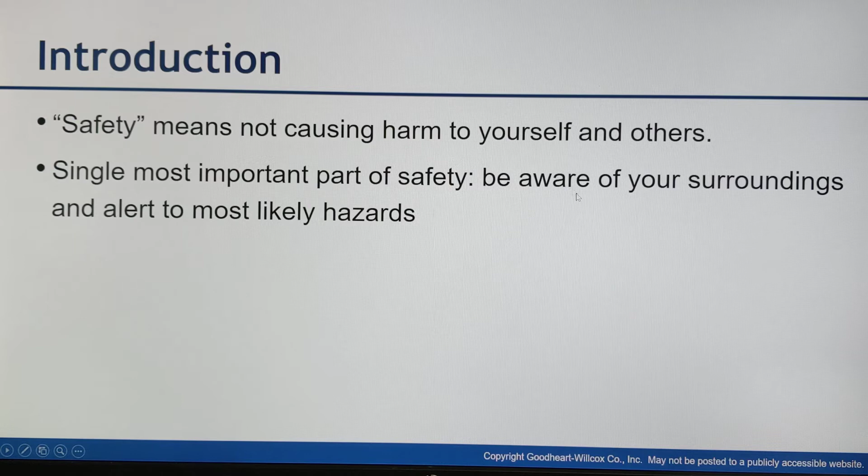The single most important safety practice is to be aware of your surroundings and alert to the most likely hazards. In the welding shop, if you see water on the floor, you don't weld on top of it. If you're going to use a grinder, have your face shield, safety glasses, and earplugs in. If you're around somebody using a torch, don't stand right next to them while they're using the flame. It all goes back to every field you're going to be in: know your surroundings and keep an ear and an eye out for what happens.

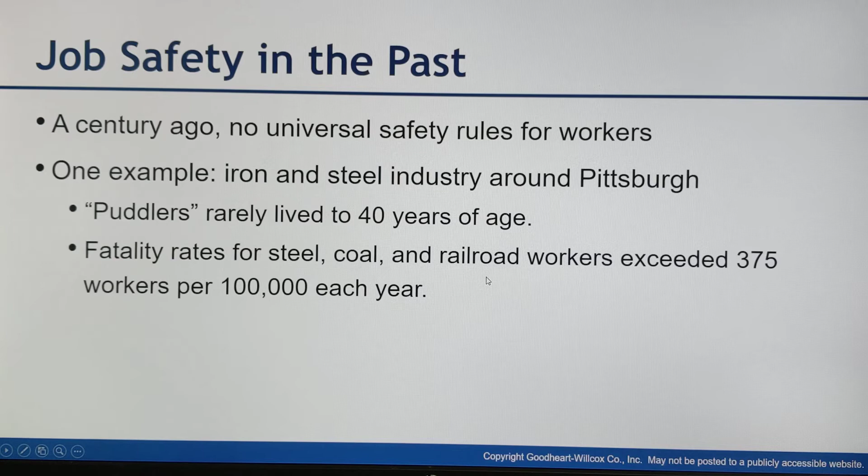A century ago, there was no universal safety rules for workers, and it was actually pretty bad. There was a reason why unions started coming up and OSHA became a thing: the death rate was so high for anybody in the industrial field that people didn't live past 40 years old. There were exceeding 375 workers per 100,000 who would die in the steel, coal, or railroad industry. So it was very high.

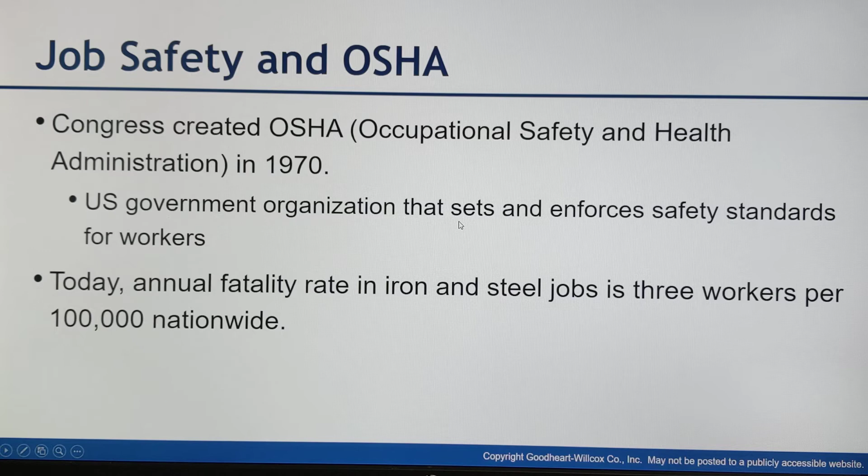In 1970, OSHA, the Occupational Safety and Health Administration, was passed, and since then it has dropped from 375 down to just 3 workers nationwide. So it has dropped significantly once OSHA became a thing. And you have to think, that was 1970 - it's only 2020, but that's been 50 years. Some of us, myself included - I was born in 1990 - so only 20 years with the true OSHA organization in place. Now we look at fire safety, and we have the NFPA, the National Fire Protection Association.

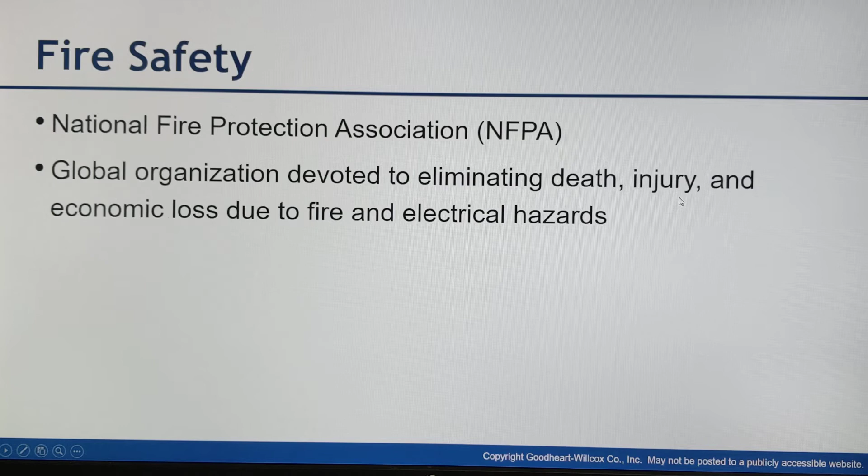A lot of these things are set up to help prevent deaths and injuries. The worst part to think about is that for every rule, law, organization, or association that's come out, somebody has died for it. So just remember that for every injury out there, or every rule we place, somebody has seriously gotten hurt because of it.

Going over normal safety, we have the different types of fire extinguishers: class A, B, C, D, and K. A is for ordinary combustibles, B for flammable liquid, C for electrical equipment, D for combustible metals, and K is for kitchen fires, like when your oil starts to go off.

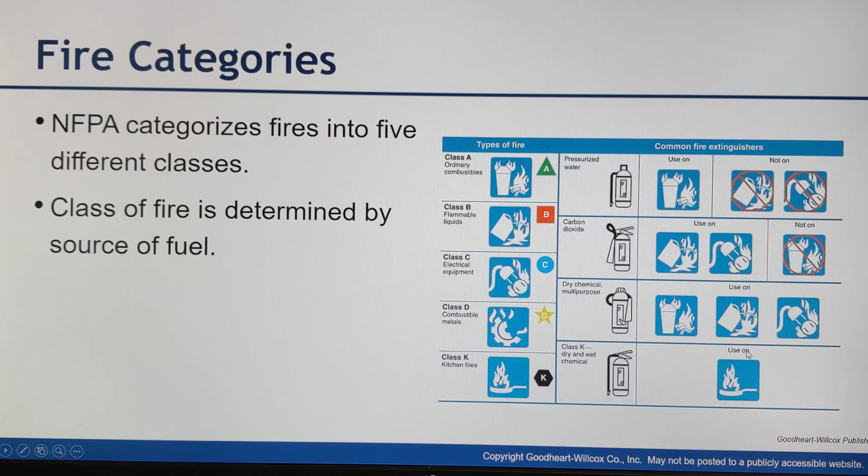Fire extinguishers have different colors. The most common are A and B. D is used for metal fires, like magnesium.

Safety in manufacturing - safety in production - always requires safe and properly installed equipment. You have to make sure you have it. Even in the welding shop, we have fire extinguishers around, and we have equipment for if you catch on fire or get something in your eye. This is stuff that happens in the manufacturing field, on a construction site, and so on. There's equipment everywhere.

One of the best things to remember is that horseplay should never happen. Sure, everybody cracks a joke or plays around, but true horseplay can get people really hurt. So try your best not to do it, and if you are going to, do it somewhere you're not going to get hurt.

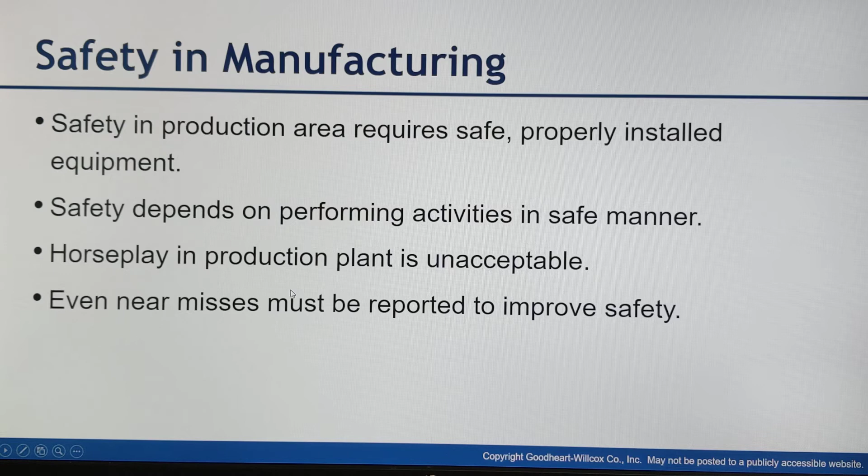These are very important things. Next, let's go to our equipment. We all know about PPE, personal protective equipment: safety glasses, safety shoes, hard hats, breathing filters if you need them, and hearing protection.

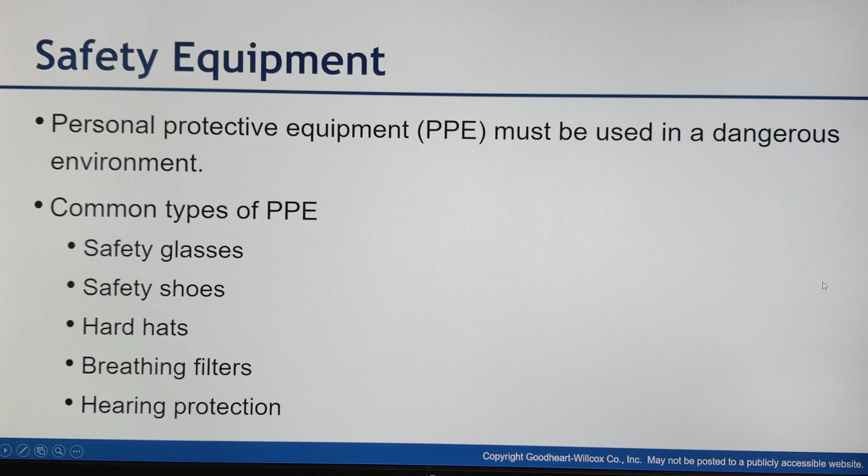Safety glasses are the most required PPE. In all fields, if you go out there, one of the number one things you have to have is some type of safety glasses.

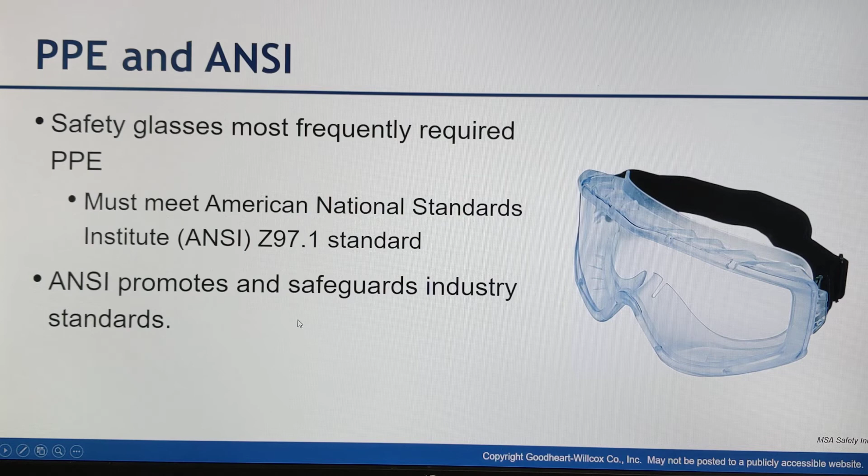The American National Standards Institute, or ANSI Z97.1 standard, is what your safety glasses have to meet to be registered under that. It also promotes and safeguards industrial standards. This is stuff we do all the time, and you need to follow it very carefully.

If you see in this picture, they are wearing equipment because they are around liquid metal at this moment. Not just like when we're welding and have a small puddle of liquid metal - no, this is a giant container that's thousands upon thousands of degrees hot, and just being around it without this protective gear could burn their skin off.

Foundry workers must have additional protective equipment: leggings, aluminized reflective coats - that's what this is - or completely reflective suits, gloves, tongs for handling hot metal, a breathing mask or respirator system, and also hearing protection.

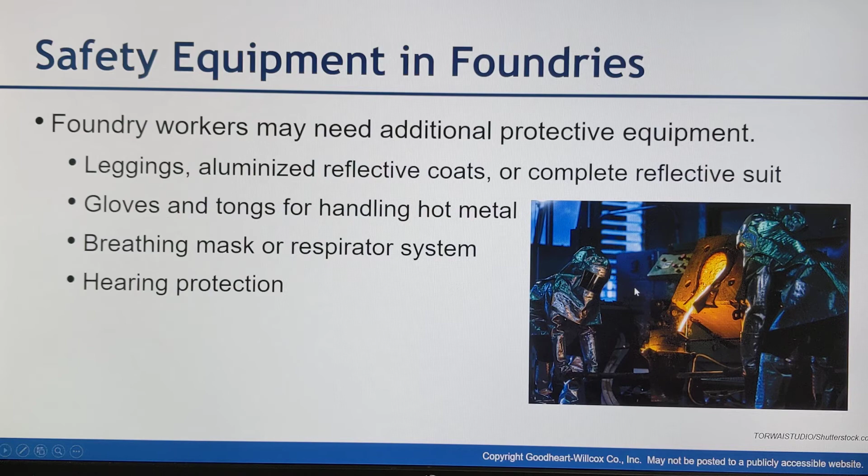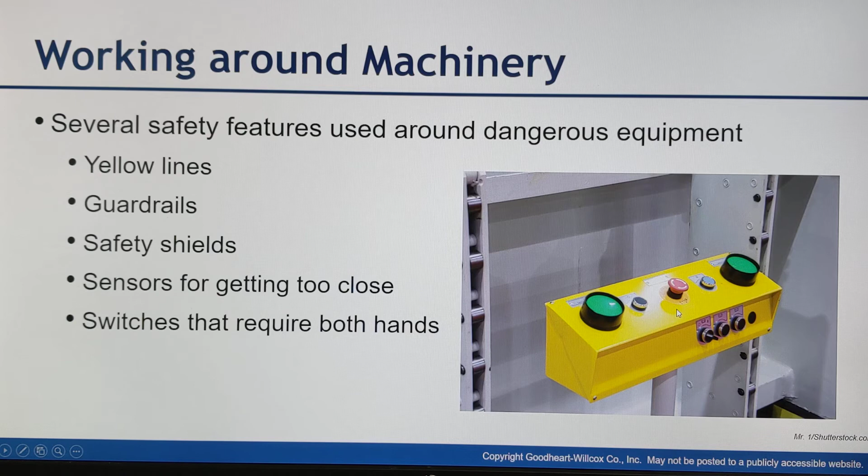Working around machinery, you're going to have your yellow lines, guardrails, safety shields, sensors for getting too close, and switches that require both hands. Right there in the middle, you see the emergency stop where you just hit it and everything dies in case something happens.

When it comes to stuff like working on a metal stamping press: jog the ram to the open position, shut power down and lock the power switch, put in blocks to prevent the ram from coming down, and make necessary adjustments. This is just for stamping metal.

When they're talking about putting blocks in to prevent the ram from coming down, it's kind of like a giant piston that goes up and down and makes the actual press. While the machine is up and holding it, if for whatever reason it lets go, that ram will just fall. And if you're under it, it's thousands of pounds and it will not care about you.

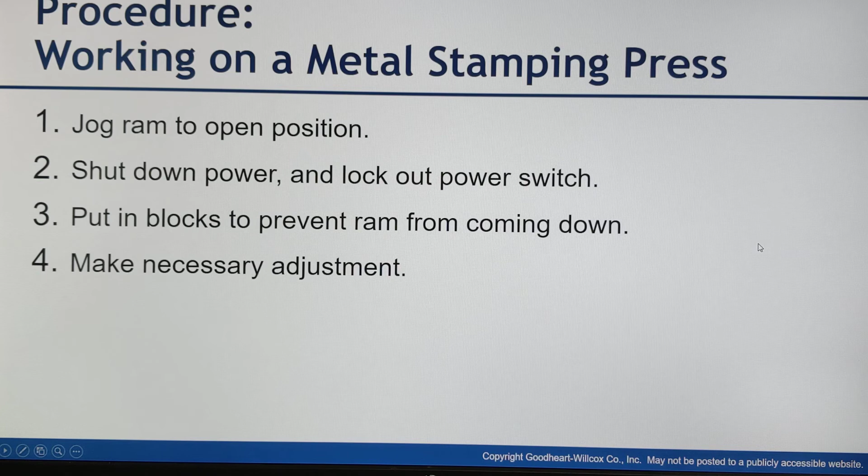So you have to put the blocks in. This is stuff you have to think about. Another way to think of it is if you've ever worked on a car, and somebody had to get under it - they put it up and then put bricks or blocks behind the back tire so it doesn't roll away. It's the same concept. You're just trying to prevent anything that could happen.

Then we have the safety data sheet, or its old name, the material safety data sheet. The SDS or MSDS is always required - that is a rule, it's required by OSHA and everybody has the right to it. It provides the manufacturers, distributors, and importers with the potential dangers and what your precautions are, and if something happens, what you're supposed to do. And like I said, it is by law posted and available to all employees.

I don't know why 'or' is here. It is available - so if you have a question when you're on the job site about something, you ask for the safety data sheet. It is available to you by law.

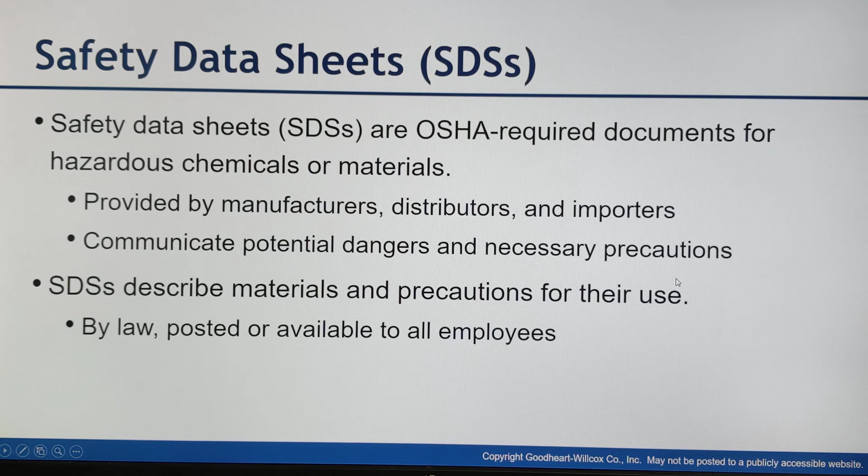Hazardous metal: hot metal between 200 to 900 degrees Fahrenheit, or 90 to 480 Celsius, does not glow - it just looks like cold metal. And if you were to touch 900 degree metal to your bare skin, it will just burn it instantly.

So this is also why we tell you to wear gloves almost at all times. You don't know something's hot sometimes until you touch it, and then it's too late.

So you got to be careful with metal. There's a reason why we make knives and stuff like that out of metal.

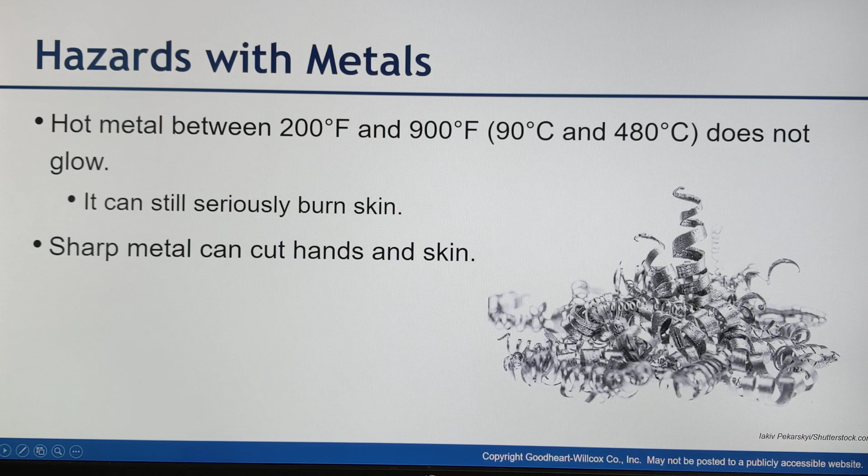Labs have several different safety concerns, like what type of etchings you're using. There's corrosive chemicals like hydrofluoric acid, which is highly corrosive to human skin and will just melt it away. So they have to have a treatment kit.

Lab technicians must be trained in these types of safety concerns, because there's a lot of stuff when doing metallurgy that could be very dangerous to the human body.

And then, the effects of accidents on the job. A lost-time accident requires more than just minor first aid. You might not be able to return to work due to the injury, you could be crippled for the rest of your life. The accidents must be recorded, so there's a lot of paperwork involved, and they have to investigate and make sure that everybody now understands. So for the company it costs thousands of dollars, and for you it might cost you your life.

It's very important that you follow all the safety procedures, and nobody wants to get hurt, because what's the point? Everybody talks about how you'll make a lot of money if you get hurt on the job, blah, blah, blah. Well, if they can find a reason to blame it on you, you get nothing. So if you really want to take that risk, go for it. But if they have a reason to say it was your fault, you will get nothing and you will be hurt for the rest of your life.